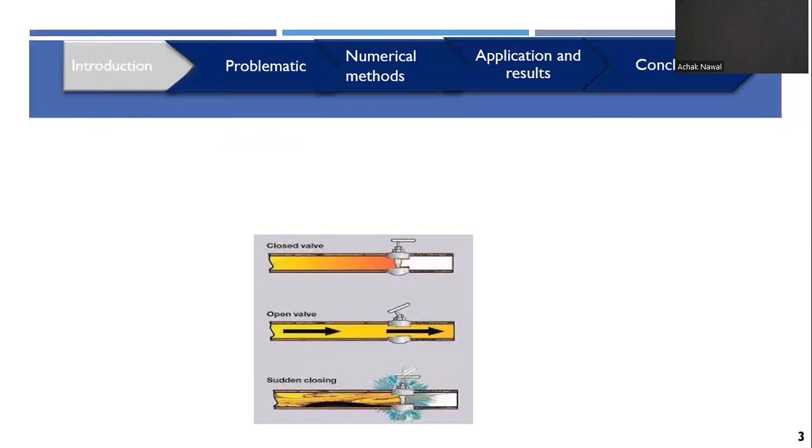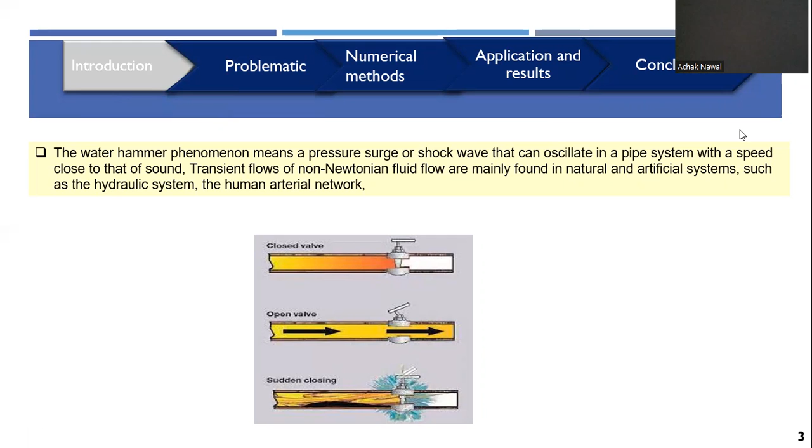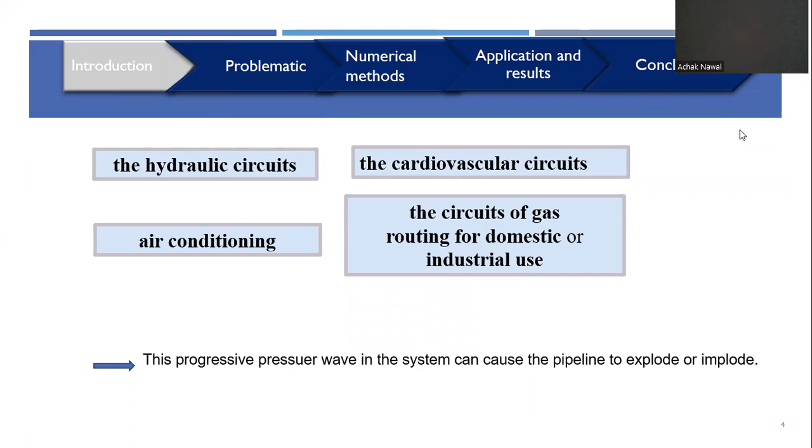The water hammer phenomenon means a pressure surge or shock wave that can oscillate in a pipe system with a speed close to that of sound. This phenomenon of non-Newtonian fluid flow is mainly found in natural and artificial systems, such as hydraulic circuits, cardiovascular circuits, air conditioning, and circuits of gas routing for domestic or industrial use. But this progressing pressure wave in the system can cause the pipeline to explode or implode.

Now we move to the problematic. In this study, we consider a pipeline with valve and reservoirs. We also consider some assumptions and simplifications, such as a quasi two-dimensional system, meaning Vθ and Vr equal 0, and Vz is the only velocity component that varies along radial and axial directions, and also the convective terms are neglected.

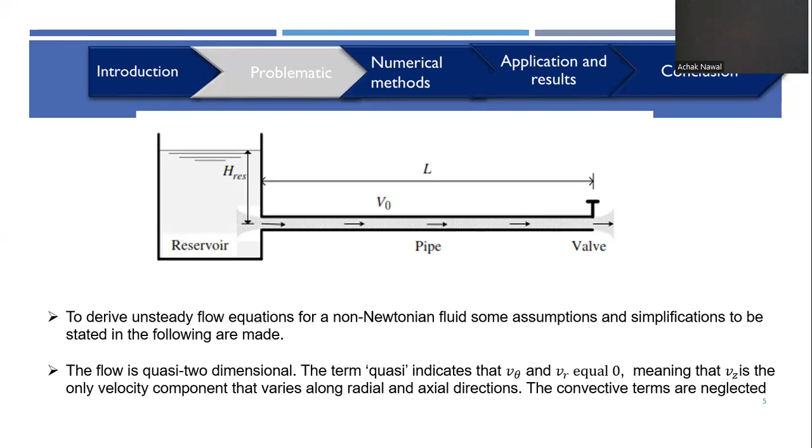The governing equations, both global and local, are presented here with different parameters such as average velocity, pressure head averaged, wave speed, density, time, steady friction, actual velocity, and also shear stress. The particularity of this study is to consider both systems, local and global.

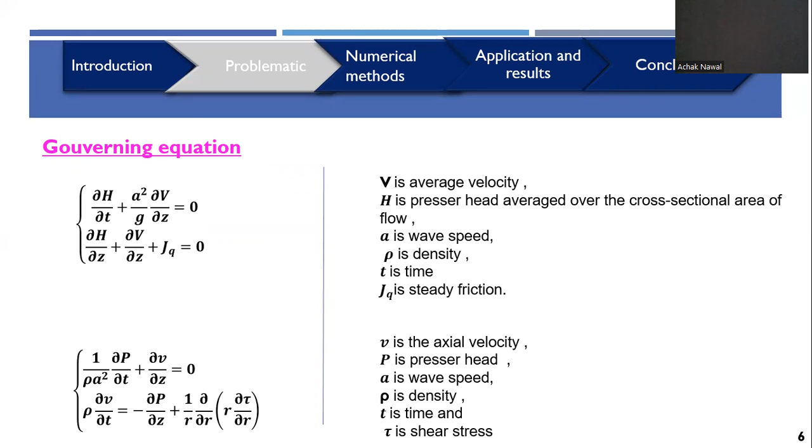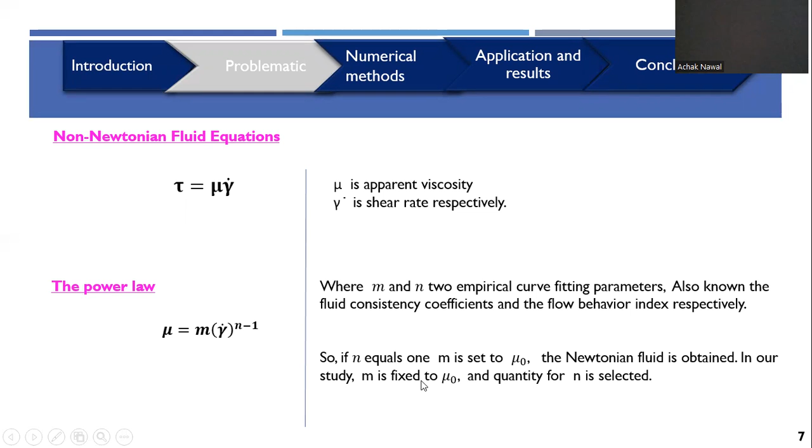Here we move to non-Newtonian fluid equations, since we consider non-Newtonian fluid. This equation is presented with parameters apparent viscosity and shear rate. The power law is used here to present the component of fluid with M and N as two empirical coefficient parameters; we consider N equal to 1 here. If we consider Newtonian fluid, M is set to mu0, so M is fixed to mu0 and the quantity of N is selected.

Then we move on to boundary conditions, which are considered, and then initial conditions also. Here we consider steady state flow, with these conditions.

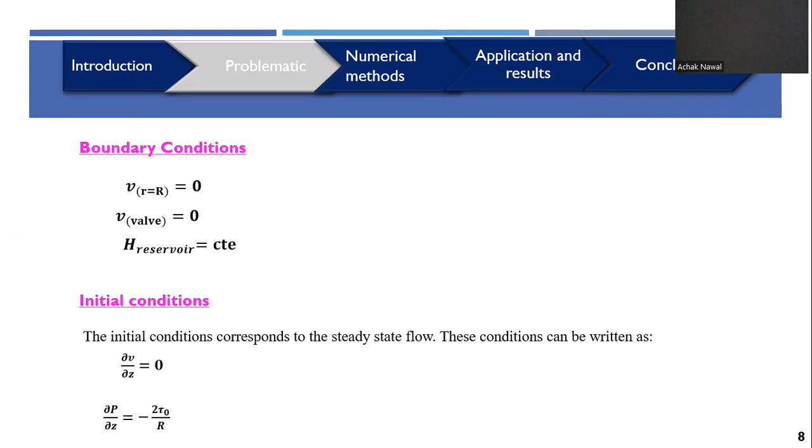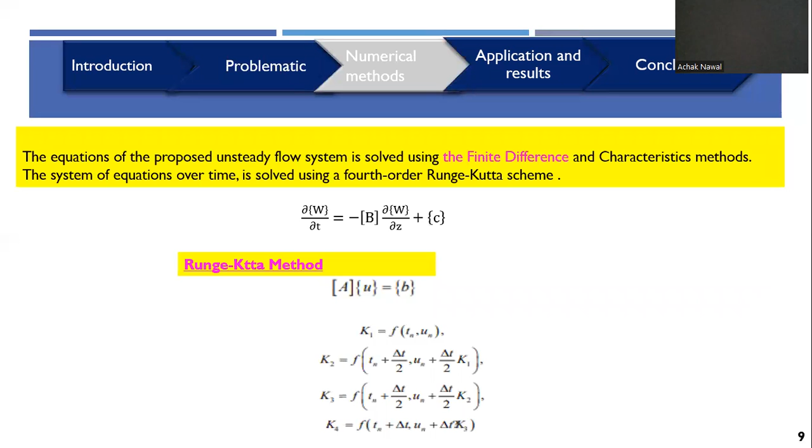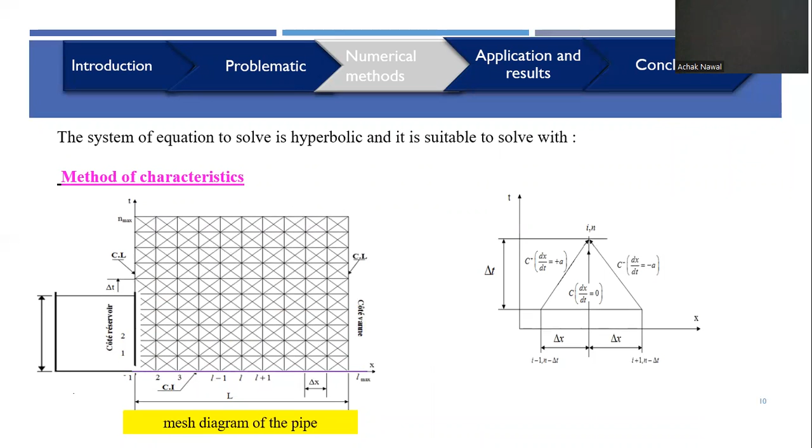Here we move to numerical methods. We consider or use the finite difference method and the characteristic method, both for spatial discretization, and for time discretization we use a fourth order Runge-Kutta scheme. Here I present the principle of the method of characteristics, which is available for this type of system, a hyperbolic system. Then here I present the principle of the fourth order Runge-Kutta method.

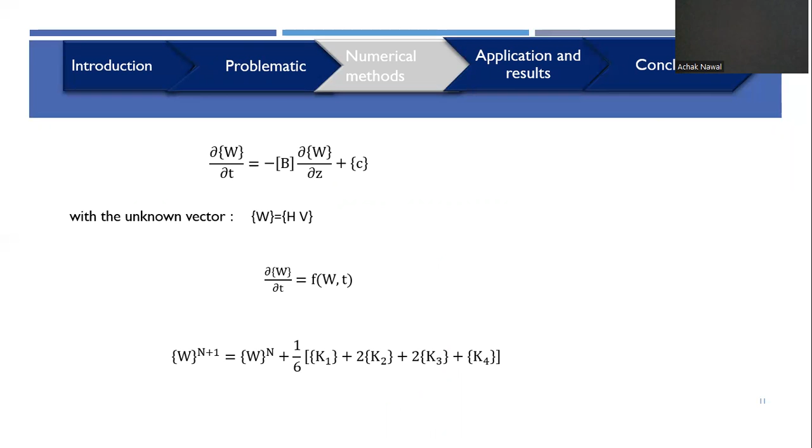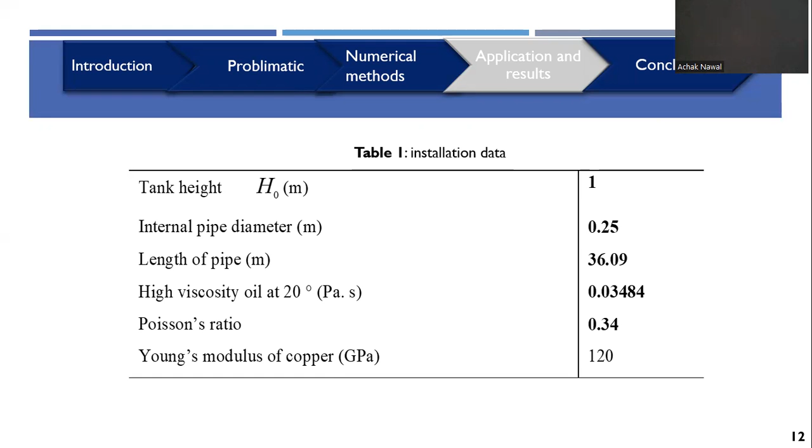Then here we move to application and results. In this table, we present installation data, the data of the problem with tank height, internal pipe diameter, the length of pipe, the high viscosity of oil used here, Poisson's ratio, and the modulus of copper.

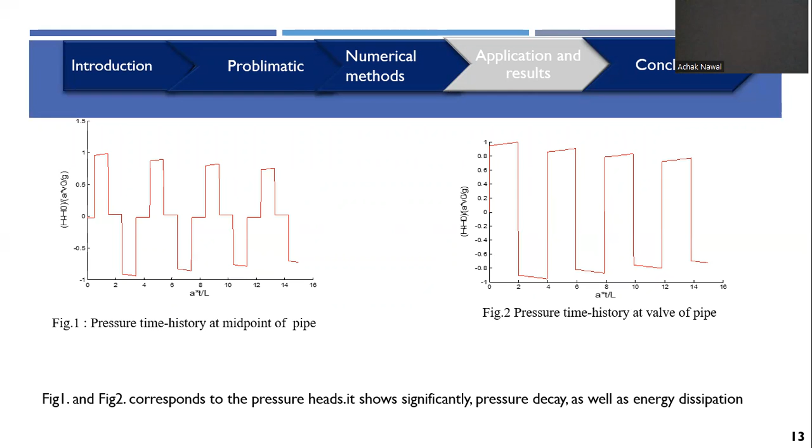And then here we move to application with curves. We present pressure time history at a mid point and at the valve of the pipe. These two figures correspond to the pressure heads. It shows significantly that pressure decay and energy dissipation occur.

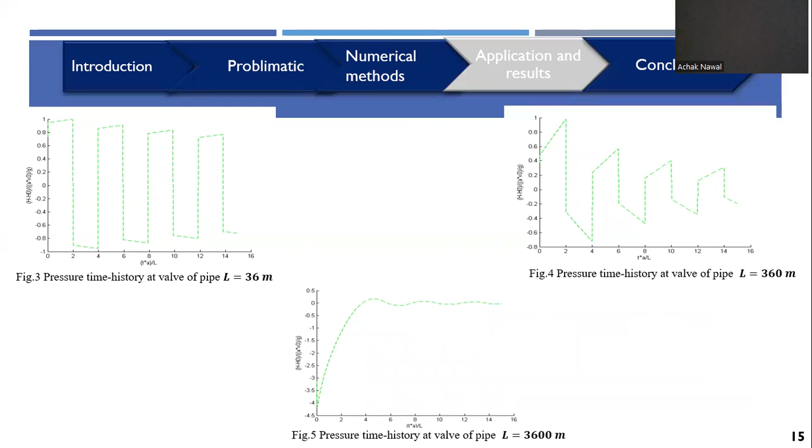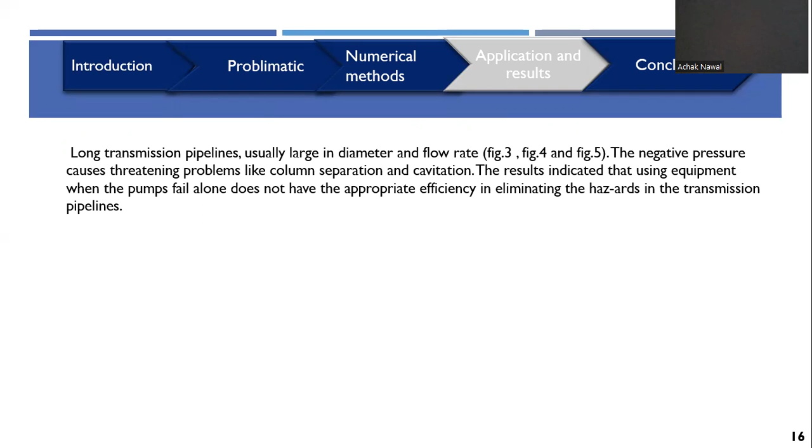Here we present pressure time history at the valve of the pipe for different values of length of pipe. We consider L equal to 36 meters, then 360, and then 3600 meters. We can conclude that long transmission pipelines, usually large in diameter and flow rate, cause negative pressure, which can cause column separation and cavitation. These results indicate that using equipment such as pumps alone does not have the appropriate efficiency in eliminating the dangers in these transmission pipelines.

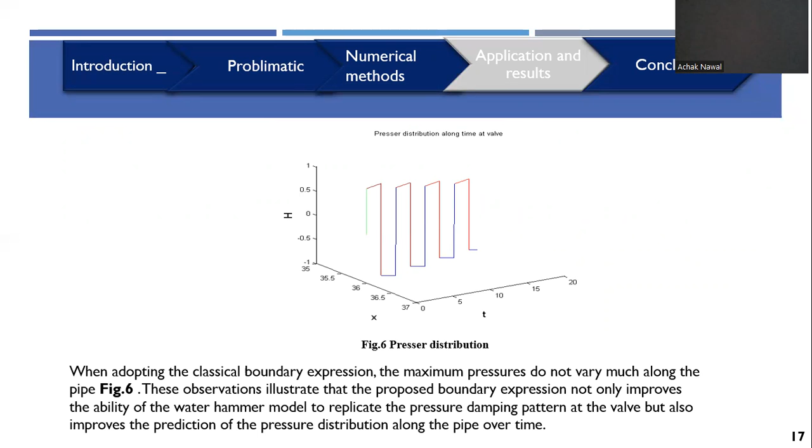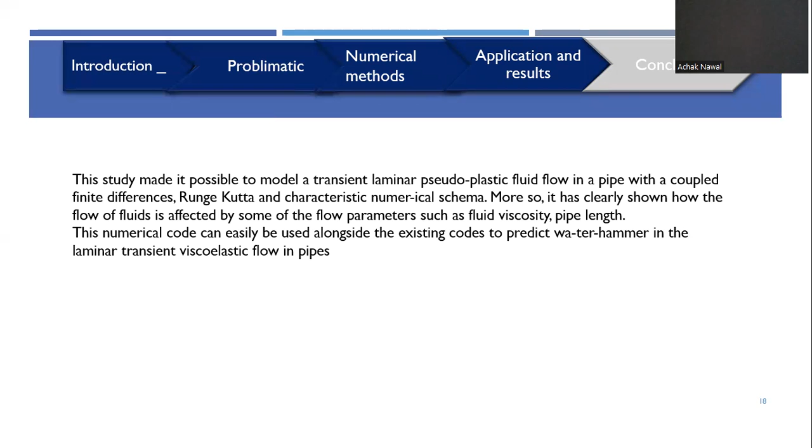To conclude, this study made it possible to model transient laminar pseudo-plastic fluid flow in a pipe with a coupled finite difference, Runge-Kutta, and characteristic numerical scheme. Moreover, it has clearly shown how the flow of fluids is affected by some of the flow parameters, such as fluid viscosity and pipe length. This numerical code can easily be used alongside existing codes to predict water hammer in laminar transient viscoelastic flow in pipes. Thank you for your attention.